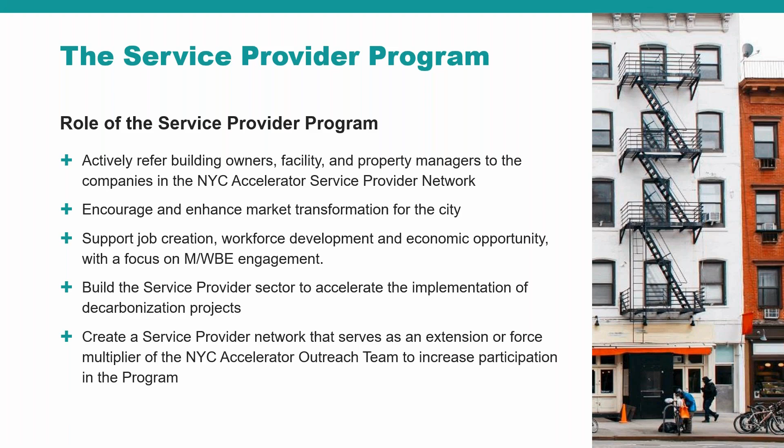So we're looking to build the service provider sector to accelerate the implementation of these decarbonization projects, and we do seek the help of service providers. So when an organization does become a New York City Accelerator service provider, we view that service provider as an extension of New York City Accelerator's outreach team.

You'll also have access to our entire bench of account managers, expand skills, and grow your team. You'll also be invited to participate in New York City Accelerator's networking events and any trainings that we do hold. And we also will provide access to our financing and solar specialists. One of the things that I don't think is on this slide is we do provide our service providers with a full marketing toolkit and a financing toolkit as well.

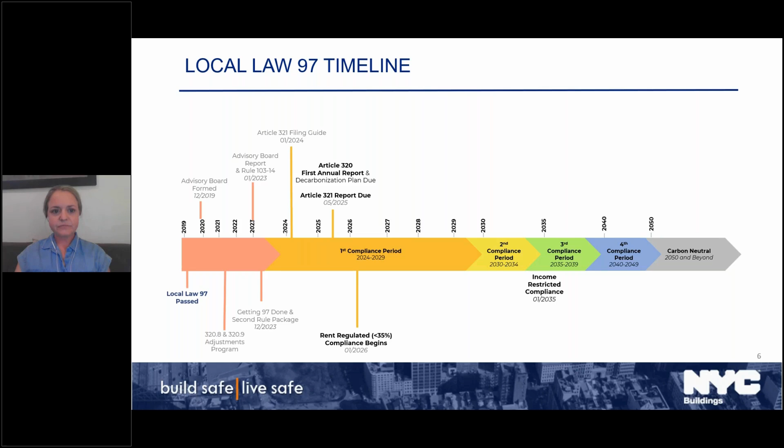Local Law 97 is broken down into two compliance categories: Article 320 and Article 321. Article 320 is for most private sector buildings and certain affordable housing. Article 321 is for very specific types of affordable housing buildings and houses of worship. Today we're just going to talk about Article 320 and calculating the annual emissions and emission limits related to that article.

This is a little bit about the different compliance pathways for Article 320 that you see circled. These are the annual reports that need to be filed by May 1st every year, starting next year—approximately 34,000 buildings. These are buildings that over time will have to reach carbon neutrality by 2050, meeting emission limits that drop every 5 years, maintaining that trajectory of compliance.

Article 321, which we're not getting into today, is a one-time report due next year. Our next service provider training will focus on Article 321. I also want to mention that city buildings and NYCHA are still subject to Local Law 97 on a portfolio-wide basis. However, those buildings are not reported to DOB, and we don't have oversight—that's with DCAS and NYCHA.

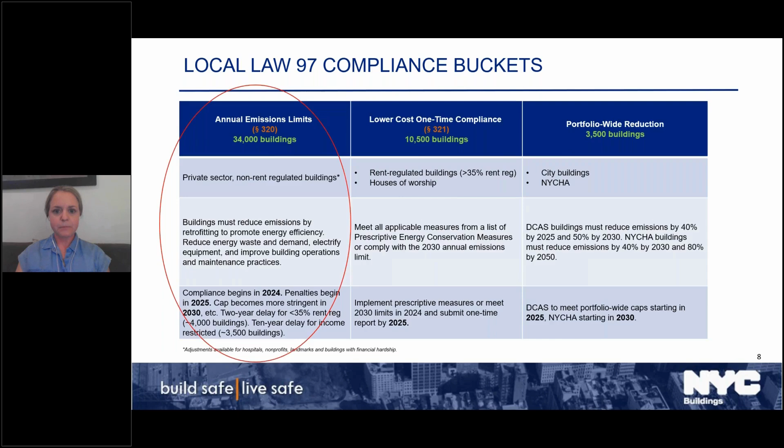I also wanted to mention that the historic sustainability laws, benchmarking, energy audits and retrocommissioning, have been enforced on the lot level at the BBL level. But Local Law 97, we're transitioning over to compliance on the building level. And that's important for a variety of reasons. A lot of the industry is used to reporting on the lot level, but this law is written differently, so we need to enforce it according to each building. We'll also be making that transition with the other sustainability laws in the next year as Local Law 97 reports become due.

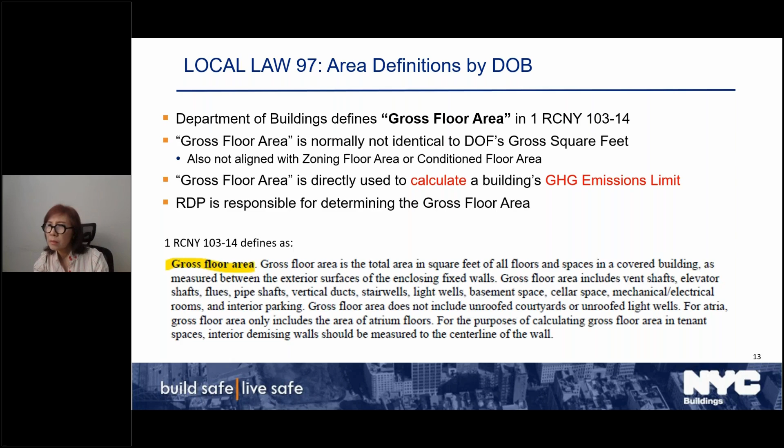Okay, so now let's take a look at the scenario. This scenario is there are multiple buildings, actually 2 buildings on the same tax lot, and they share energy service.

So in this case, they're on the same tax lot, same owner, they share energy service, and they could submit a combined report only if building 1 and building 2 follow the same Local Law 97 compliance pathway.

There was a slide 9 earlier, Emily explained extensively. Some buildings are subject to Article 321, and if this Article 321 building shares energy service with an Article 320 building, they cannot combine the report. Their report has to be separate.

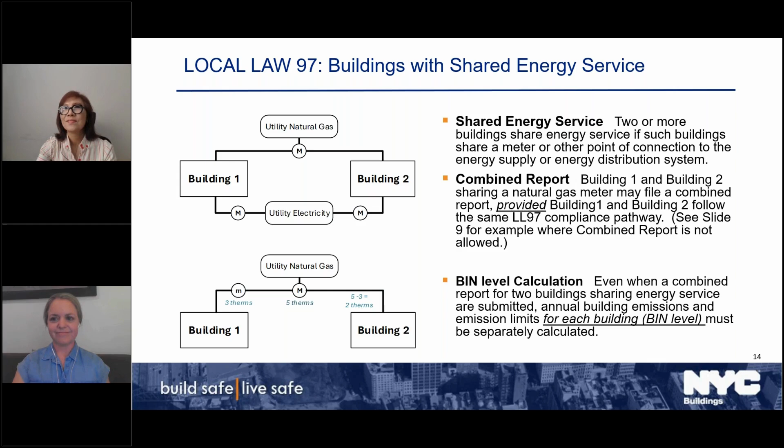And I think, yeah, with that, I can turn this over to Emily. Thank you. All right, thank you, Jean. Next slide.

So to determine the GHG emission limits in tons of carbon dioxide equivalent, the building will have to be broken down into Energy Star Portfolio Manager property types and the corresponding gross floor area of that property type. Jean explained what the definition of gross floor area is - it's not the same as Department of Finance's definition of gross square feet.

And in Rule 103-14, there's a corresponding emissions factor for each property type. So when you're assessing a building, you break down each one of the property types by the gross floor area, and you multiply it by that emission factor that's either in the law or the rule. You do that for each property type, multiply them together, add them up, and that's the emission limit for the building. So essentially every building will have a unique emissions limit because each building likely will not have the same gross floor area of each property type.

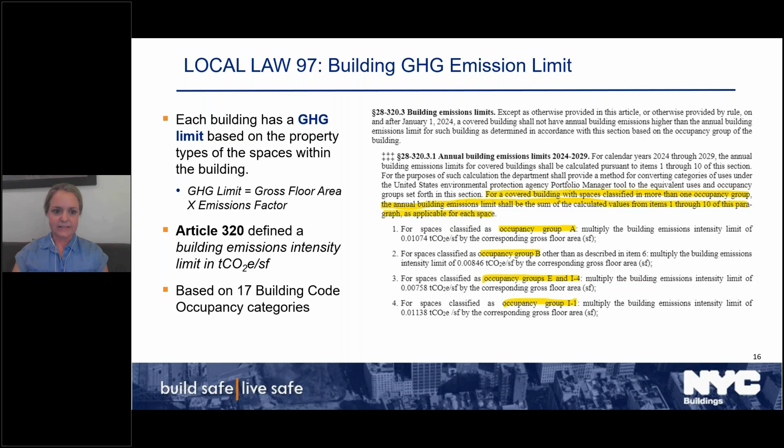There are 62 Energy Star Portfolio Manager property types that correspond to the energy use intensity within the building. So when you're going through the building and breaking out the areas, it's important to think about the different energy use profiles of each different space and assign them accordingly. We'll go through an example later in this presentation. This is where it's important for the registered design professional, when doing this reporting, to think about which property types make sense in a building and when they need to be specifically broken out.

If you're used to doing benchmarking reporting, benchmarking really wants you to classify an entire building. They have rules around when you classify an entire building under one single property type. Sometimes you can do two property types, but with Local Law 97, we're looking at a more granular approach, so it won't necessarily align with what has been reported for benchmarking.

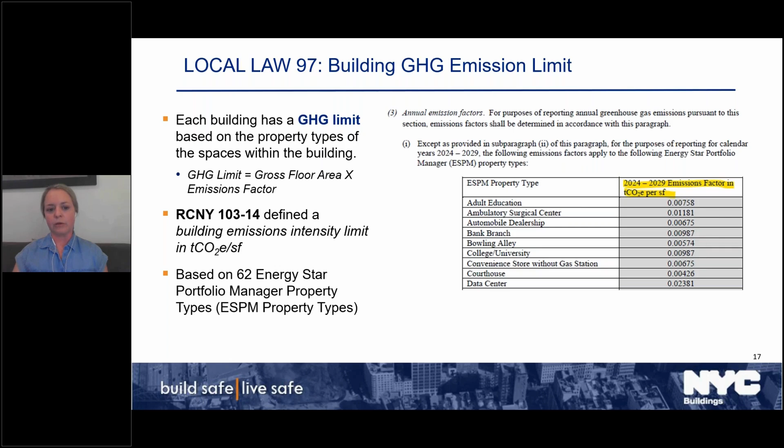For example, if there's an office building with a large data center, that data center needs to be called out separately, since it will have a higher energy use intensity limit and a higher emissions factor compared to an office space. So thinking about those different use profiles is really important when assigning these different property types. Next slide.

If you go into that report, here's an example of one of the charts, listing all of the ESPM property types. On the left, the orange rows are property types that received a lower GHGI limit than what was in the original law, compared to the occupancy groups. Green indicates a higher limit. So in this snip of the table, medical offices and other services have a higher limit than the original law. Everything in white just didn't change. So you see multifamily housing, which we have a large stock of here in New York City. That limit didn't change between the original law and moving to ESPM property types.

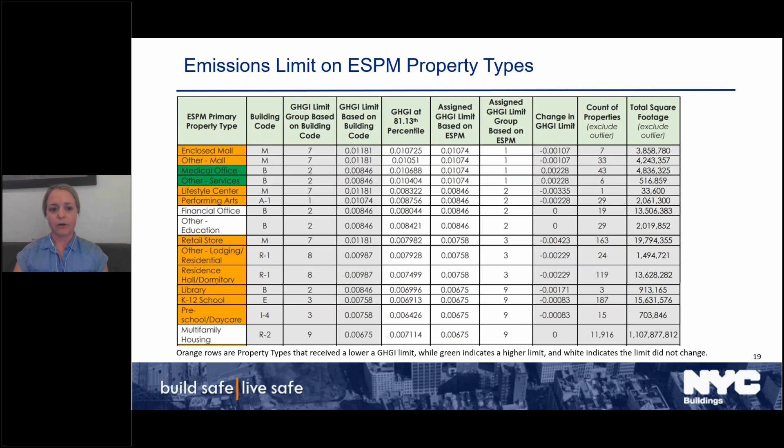So what do you do when we have two options? We have Article 320 building code occupancy categories, and we have the ESPM property types. How do you know which one to use? Well, we published a service notice in February 2023 that explains how you should approach it. Basically, in 103-14, we've said that you must use the ESPM property type limits to determine the building's limit rather than the occupancy groups. But there is one caveat.

The caveat is that most of the Energy Star Portfolio Manager property types, when we did that transition, most of those limits are higher, meaning they're more lenient under this ESPM approach than the building code occupancy category. However, some buildings have lower limits, which means they have a little more difficulty achieving compliance. So only in those cases where the emission limit was lowered under the ESPM property type, these buildings have the option to choose whether they want to go with what's in the original law with the building code occupancy category limits, or choose the Energy Star Portfolio Manager property limits. They have that choice only for the first two years. Starting with calendar year 2026, when those reports are due in 2027, all buildings must start using the Energy Star Portfolio Manager coefficients. So this gives a little bit of transition time if buildings need it.

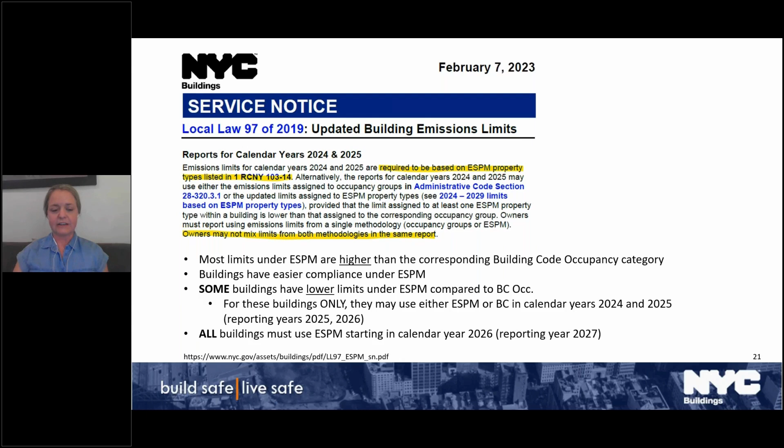One other thing to caveat is that buildings cannot pick and choose between both pathways. If they have the option to go one way or the other, they have to choose one or the other. They can't choose Energy Star Portfolio Manager property types for part of the building and building occupancy categories for the other part. Again, all that's detailed in our service notice. Next slide.

This slide is just reiterating that starting calendar year 2026, reporting year 2027, all buildings must go with the ESPM property types listed in Rule 103-14. All right, I'm going to pass it off to Jean now to walk us through some examples.

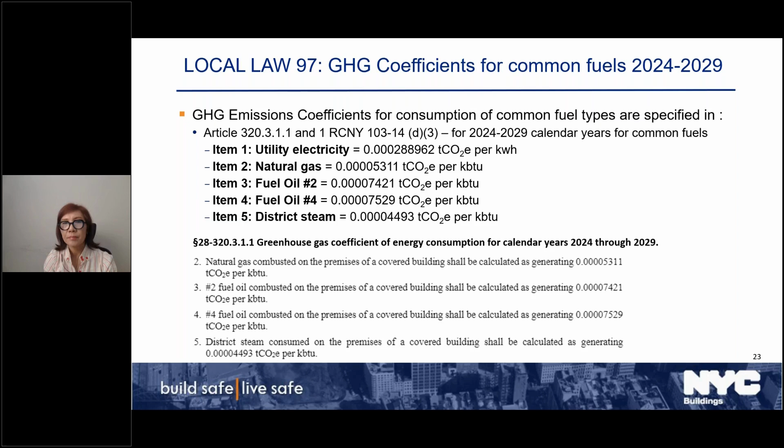Local Law 84 benchmarking has the same covered building criteria of buildings over 25,000 square feet, whose annual fuel and water use have already been reported. So we are using the same annual fuel use data for Local Law 97. Can we have the next slide, please?

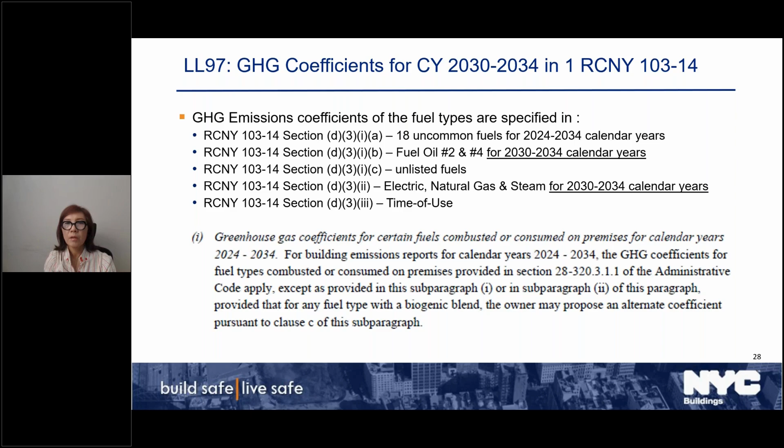For compliance period 2030 to 2034, we have the greenhouse gas emissions coefficients listed in RCNY 103-14. We won't go through all of this individually, but you can always go to RCNY 103-14 for other fuel type coefficients for further compliance periods. Next slide, please.

So to summarize, 70% of New York City electricity will be from renewable energy sources by 2030. And New York State aims to achieve 100% renewable electricity by 2040.

And then Con Ed has its greenhouse gas reduction goals for district steam. And if you look at the table, the grid electricity and district steam, because of that effort, the greenhouse gas coefficients are getting smaller over the compliance period. So if you see the green text there, you're seeing the diminishing trend.

As opposed to that, the natural gas, fuel oil 2, fuel number 4 are fossil fuels, so their greenhouse gas coefficients are the same, so they will stay the same. They will continue to emit greenhouse gas like they did. So that's the trend it shows.

One thing that I forgot to mention, there's offsite solar, community solar, energy storage, biofuels, and cogen systems. We have future rulemaking on the way right now, so be on the lookout for that.

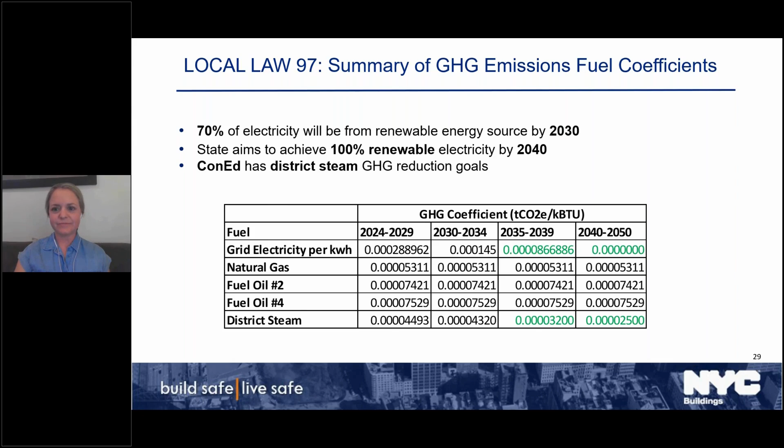They may be okay doing that in the first or second compliance period cycle, but once we get a little further and the emission limits really drop, it's going to be really difficult to achieve compliance without also shifting over to renewable energy, including the grid electricity that is anticipated to be renewable.

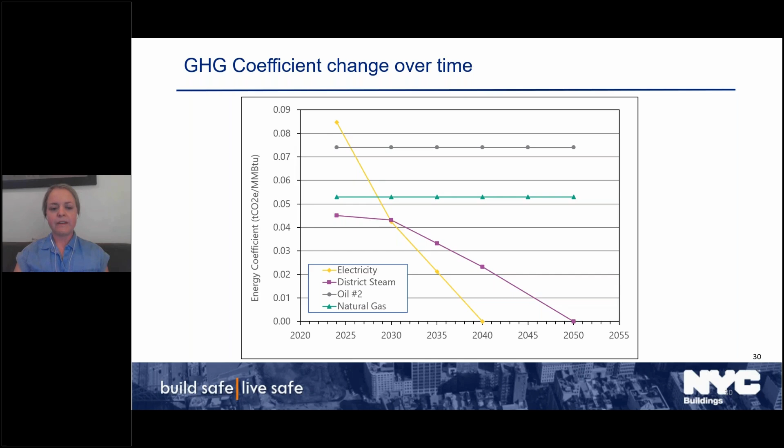Next slide. And this is just a summary of everything we covered, the formulas for calculating the annual emissions and the GHG emission limits.

And again, this is per building, not per lot. So that shift is happening in compliance. Each building needs to be considered, not each BBL. And like we mentioned earlier, it's important to go through that exercise and determine which buildings on the BBL are subject to different compliance pathways.

Again, compliance is met when the annual emissions is less than or equal to the limit. And just strategies for getting there—we didn't go really into strategies, but at a high level, obviously if you reduce your fuel use, meaning you have more energy efficiency savings in your building, that's going to reduce emissions.

If you reduce your fuel coefficient, you'll reduce your emissions. So going back to that graph, I think oil number 2 is the highest, natural gas is a little lower, but then electricity and the district steam really decrease over time.

So as we see those renewables enter into the grid with the offshore wind and the hydropower and a lot of solar coming online, that electricity coefficient is going to drop significantly. And then starting in 2030, in the second compliance cycle, electricity will have the lowest coefficient.

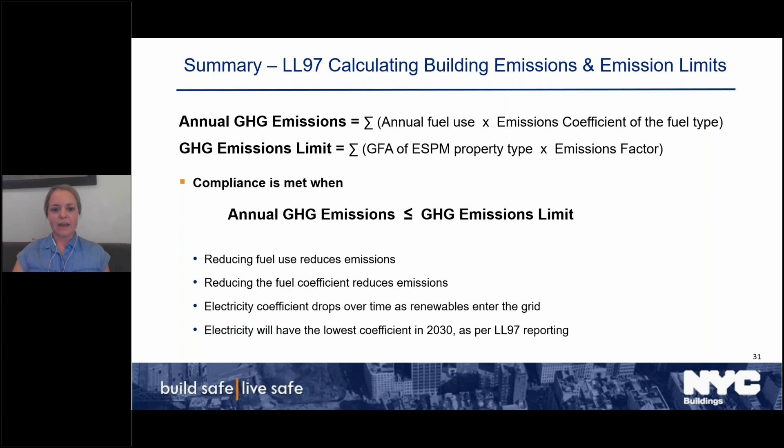And there was another question about when you have two different buildings on two different lots that are owned by two different parties, but they share an energy source, such as a cooling tower on one lot that supplies that building and the building on the other lot—can you submit these as a campus? And the answer is no.

In this case, if there are no separate meters or sub-meters, then there has to be an agreement between the two owners indicating how much fuel usage was consumed by each building, and the energy use of each building has to be arrived at mathematically through a methodology that's determined by a registered design professional and approved by the department.